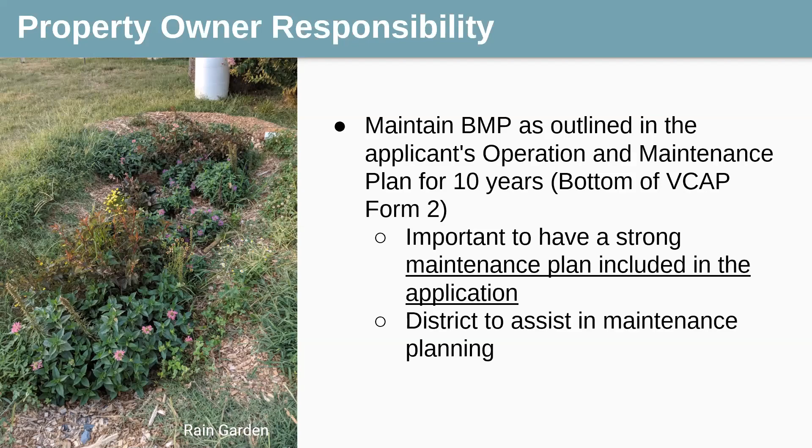And we do have this Form 3 that is on our website. It is required to be submitted to us with payment requests to be able to send payment to the district to be sent to the landowner. And it lays out everything that is binding for the landowner in terms of a contract. I highlighted this one section that the landowner accepts responsibility for the maintenance of the BMP for the duration of its project lifespan, and they're responsible to maintain it as per installation. And all that documentation should be submitted to us with the payment request, so we know what was installed and what is expected to be maintained.

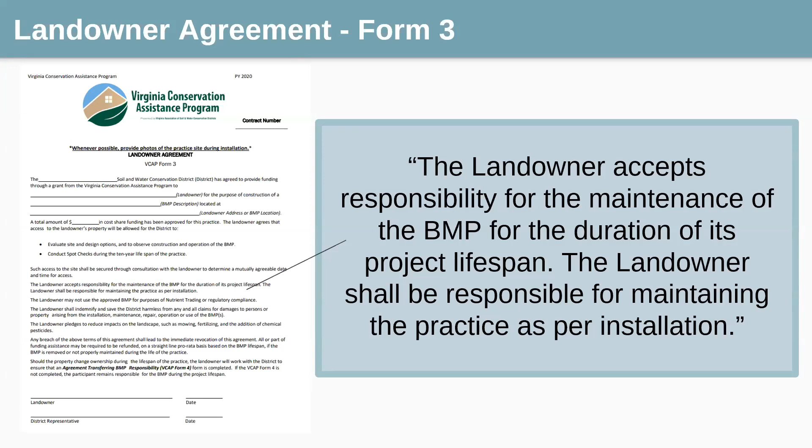And some districts handle this differently. They may collect this at the initial application, or they might just submit it to us for the payment request. Doesn't really matter as long as we have an accurate Form 3 with the correct cost share amount and the correct signatures. So on the other hand, the district's responsibility, and this is more clearly laid out in the manual, is to check up on the projects that have been installed to ensure they're still viable through the spot check process. And I'm going to go into more detail just after this slide.

Districts are responsible to inform their district board and the steering committee, more so for the VCAP staff, if there are issues that are found in terms of non-compliance or any corrective action that's needed.

And like I mentioned before, that's the expectation, but the more the district can be involved, the easier this process is going to be. And Kevin, myself, and all the association staff are here to help with any issues. We're a shoulder to lean on. We're not throwing this to you guys without any assistance.

We've got your back. And the last little point on here is that the district shall ensure that the BMP is maintained regardless of transfer of property. If the property owner moves, it's still the responsibility of the district to be aware of that and get the correct paperwork, or just make sure that it's maintained regardless. And those can be various scenarios, but that's kind of the more broader requirement.

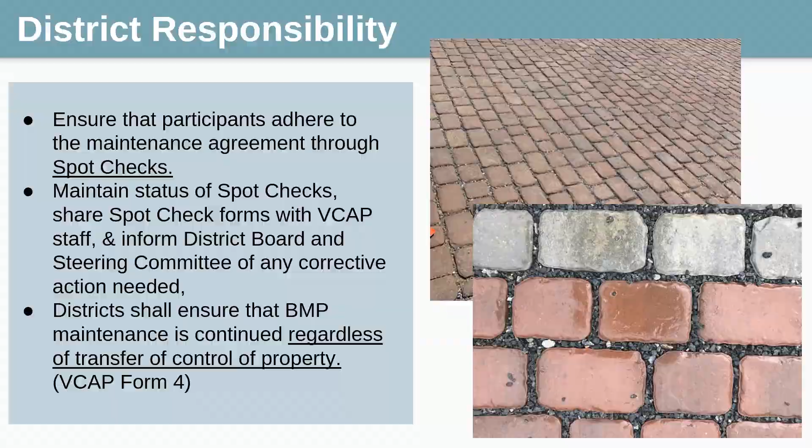Let's see, I've got some more examples of this form moving forward, but it's up to the district to notify the landowner before going on the property. And that is listed on the Form 3 that the property owner is acknowledging that they're allowing. So there's that covered base.

And spot checks are handled at the district level and should be maintained and shared with VCAP staff, like I mentioned earlier. We don't really have any more requirements other than it should be handled with the district and shared information with us, but we do want to give flexibility in how and when spot checks are done at the district level. And if you have any more questions, you can always reach out to Kevin or I.

But we do like to leave it up to the district about how they wish to do the 25% selection of active projects. And obviously the districts that have a lot more implementation and have been doing VCAP for a lot longer have more spot checks to do than districts that maybe only do a couple projects per year or are just getting started. So some projects will be inspected more often depending on the district that they're in, but the idea is that every project should be inspected about twice in a lifespan.

And the purpose of the spot checks, just to make sure we're all on the same page, they're not a technical inspection. That's only done at the initial verification for payment request. Spot checks are a visible inspection, making sure that the practices are still there, they're viable throughout their whole 10-year lifespan. And the purpose is to go through some guided questions and determine if there's any corrective action needed for the BMP to continue to function.

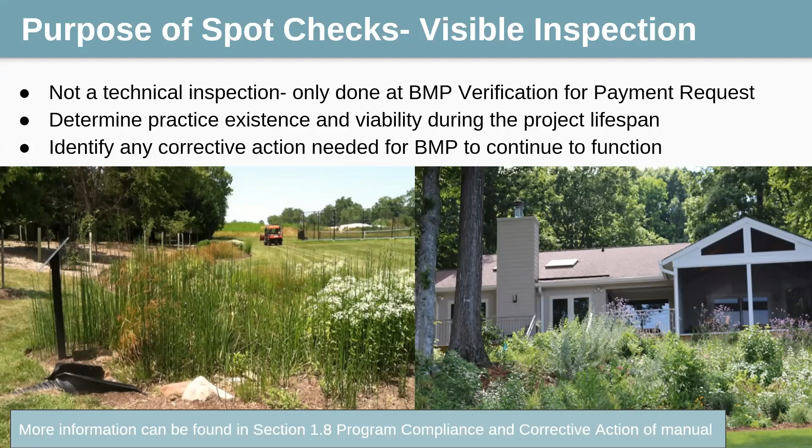If they're done every 2 years or so, we should never get to that point, but oftentimes they do need maintenance, or something as simple as taking trash out of the conservation landscaping, and that would be something that would be needing maintenance, but also very simple. And at the very end, I'll go into more details about the corrective actions policy that we have in place.

If you're looking to learn more about technical verification, which is not necessarily this, but if you are looking to learn more, I would highly recommend doing the CBLP training, Chesapeake Bay Landscape Professionals Level 1. I did it myself, as well as Kevin and a bunch of district staff, and it does really help give you experience in field verification, more so than what you need for this job, but it really does give you a bunch of knowledge and get you out in the field to actually practice doing that yourself.

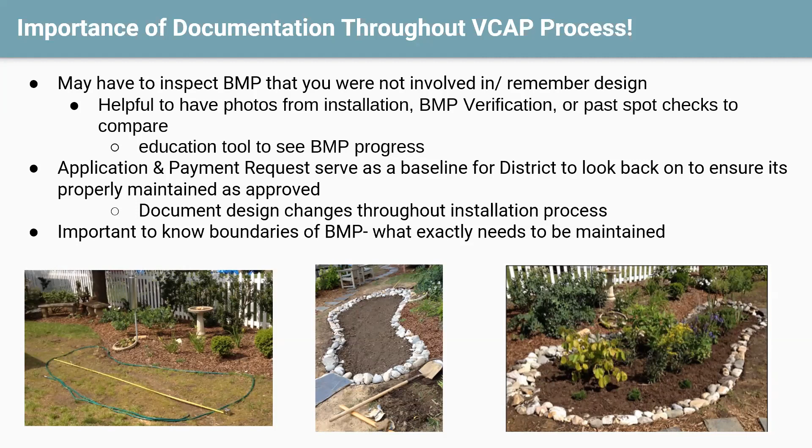And one last little note before I get into the BMP specifics is oftentimes with places of worship, HOAs or schools, the responsible party might turn over frequently, which means maintenance might fall through. So if this is the case, I would, as a district, recommend you have a more detailed maintenance plan than maybe just a property owner in a suburban area or such.

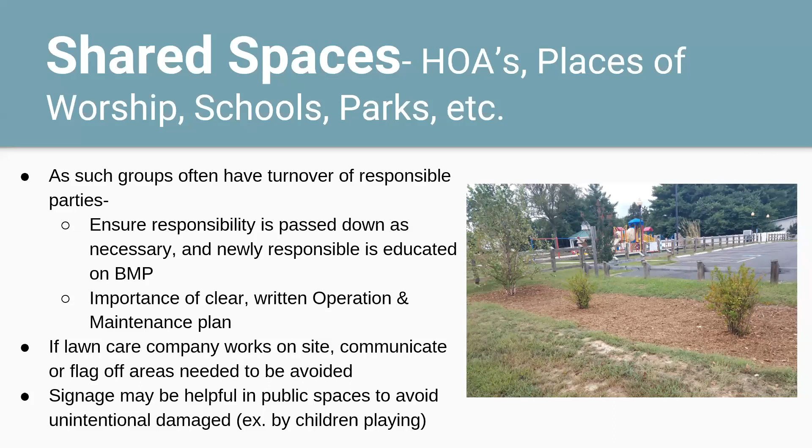Okay, so now I'm going to get into the BMP specific maintenance. And like I said, this training is from a canceled almost full day training, so I'm not going to go into full detail of what's included here, but I do want to show you where these resources are so you can refer back to them at a later date. Yes, we will go over general maintenance recommendations for these BMPs. Oftentimes the BMPs have subcategories, so just a caveat, this is a general maintenance recommendation. Each BMP maintenance plan should be site specific and really honed into what the site conditions are.

And I hope this gives people a background about how they can better educate applicants at an initial site visit, help them create a maintenance plan for their application, and give them expectations about what their BMP might look like in 2 years, and help district staff feel more confident in spot checks as we will go through each BMP and what to look out for on spot check.

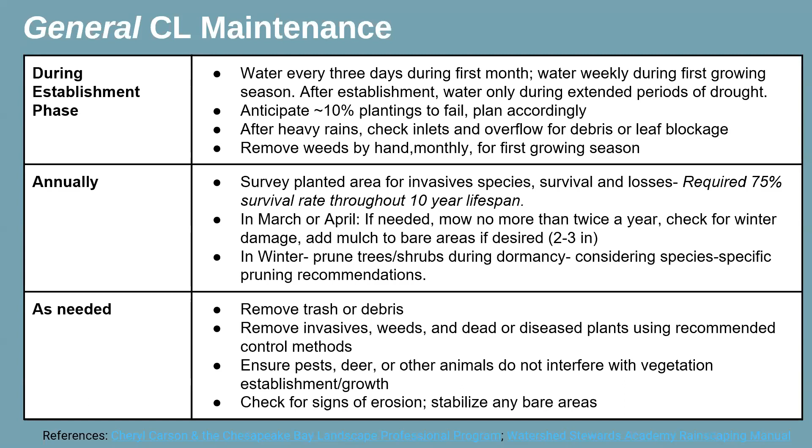Mowing is something that becomes a little trickier based on each practice, but has had issues in our program history, so developing a mowing plan with your applicant would be important if that's necessary, like for a meadow. Winterization, pruning trees that might be causing debris buildup or shade should be considered. And like all practices, removing trash or debris, making sure pests aren't interfering with it - especially early on - and looking for signs of erosion or bare areas in the drainage area.

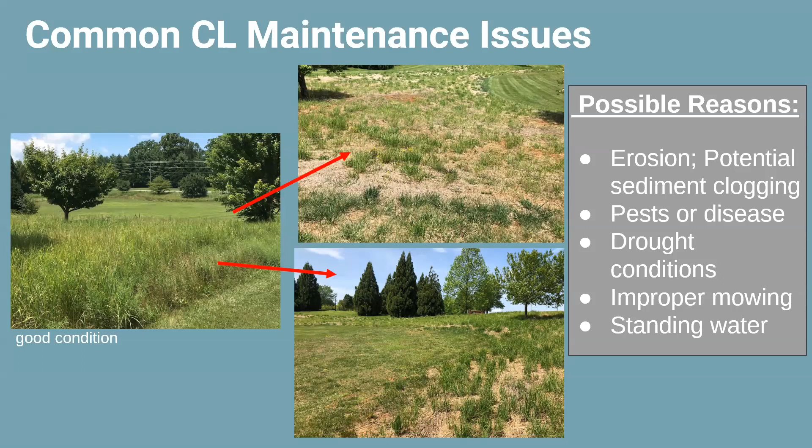Pests or disease, drought conditions, or standing water - all those things would be something that you would note on a spot check form to make a plan moving forward on how to correct. And these are not VCAP problems, or one of these is a VCAP project, but these are just in general.

Other things to look out for would be weeds, trash - especially in public places or public roads where it's kind of out of the control of the landowner - invasive species, tree tube problems, or the planting density being too low, too much mulch, anything like that. Relatively simple to fix, but it's considered a maintenance issue and something that should be corrected to maintain that proper planting density.

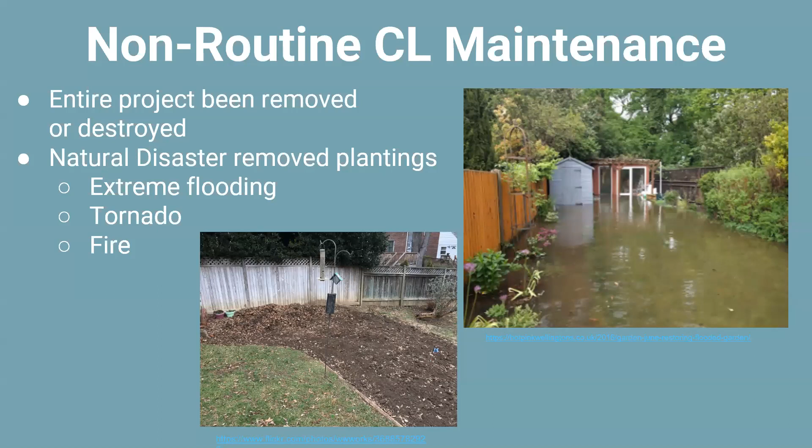These are some examples, again not VCAP, but what are larger issues that you would want to involve Kevin or myself to talk about. If you go for a spot check and the project is simply not there, that's definitely a major issue and one that we should be contacted for, especially your district board as well. When it comes to natural disasters - flooding, tornado, fire, hurricane - that's also something that you want to get us involved in so we can take the proper steps to decide what to do with that.

Okay, I'll move on to permeable pavement next.

For permeable pavement, preventative maintenance is really important for these projects, and a lot of contractors will make recommendations about how to maintain them, which is great. But at the same time, those should not be disregarded—the standard VCAP specifications still need to be maintained regardless of what the contractor or manufacturer recommends.

The most common maintenance problems to look out for and educate applicants or landowners about would be sediment clogging, or broken or shifting pavers causing the BMP to fail. Maintenance is required to include the surface material, meaning the pavers and the fine gravel in between, the observation well if present, as well as under drains, and the drainage area, which usually means the downspouts connected, the rooftop, or the site just surrounding it.

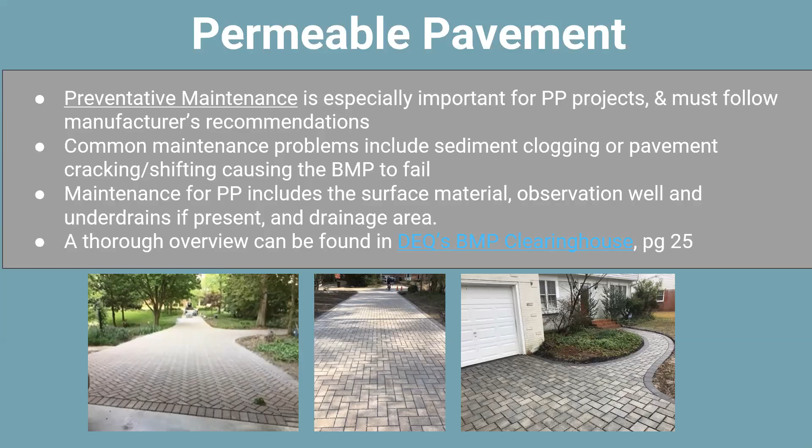This is one I really would recommend the district, and maybe a landowner if they're interested, refer to: the DEQ's BMP Clearinghouse. It's got a very thorough and really great overview of the standards for permeable pavement and the maintenance that's suggested to maintain them. Things to avoid on permeable pavement surfaces—

Usually things involving cars, oils, any kind of chemicals really should be avoided because those can leak into the pavers and cause issues. Sanding, construction activities, resealing or resurfacing the driveway is a big no-no. Power washing the house should be avoided, or just be very cautious that debris coming off doesn't clog the pavers.

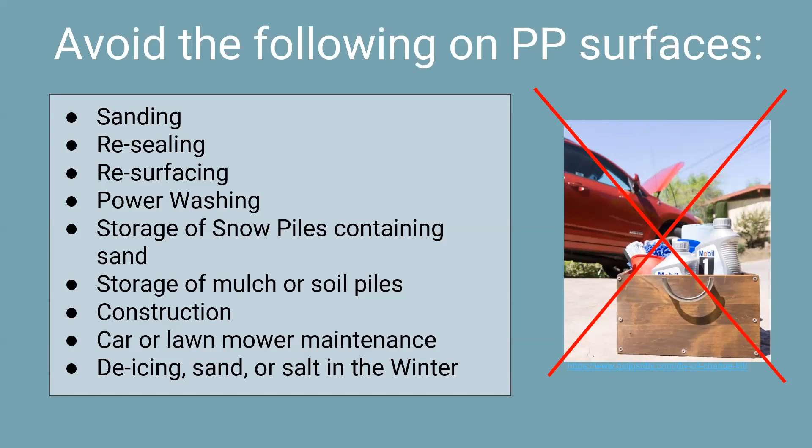Wintertime storage of snow piles, sanding, de-icing, or salt—those can cause issues as well. Same thing with big mulch piles or soil. And like I mentioned, car or lawnmower maintenance should be done off of the pavers just to avoid anything.

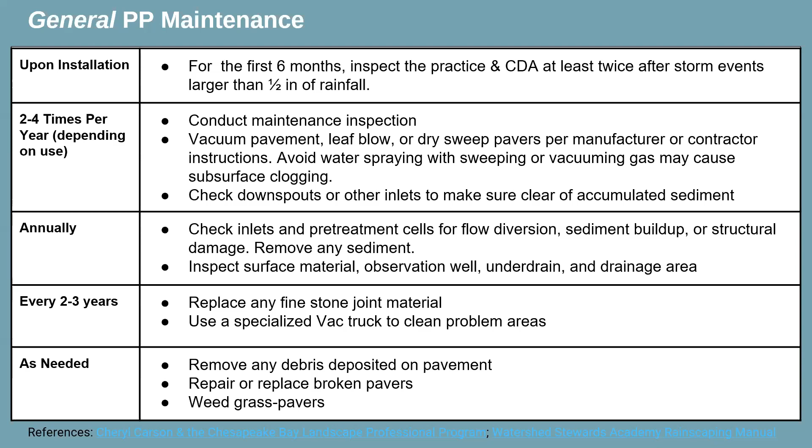Every two to three years, depending on use, replace the fine stones at the very top, or use a specialized vac truck to clean those problem areas. And if there's any vegetation growing up, that should be removed certainly, and checked to make sure it's not a continuing issue.

It is recommended that district staff, on their spot checks for permeable pavement, complete a falling head infiltration test. A lot of the functionality of permeable pavement is not seen at the surface—it's happening underneath—so it's difficult to spot check when we can't really see what's happening beneath the surface.

But again, examine the pre-treatment gutters, pavers, all of that, and make sure the drainage area is stabilized. And talk to the homeowner about whether they've seen any issues with standing water, making sure it's an open conversation so you're both on the same page and can be helpful to nip issues in the bud as quickly as possible.

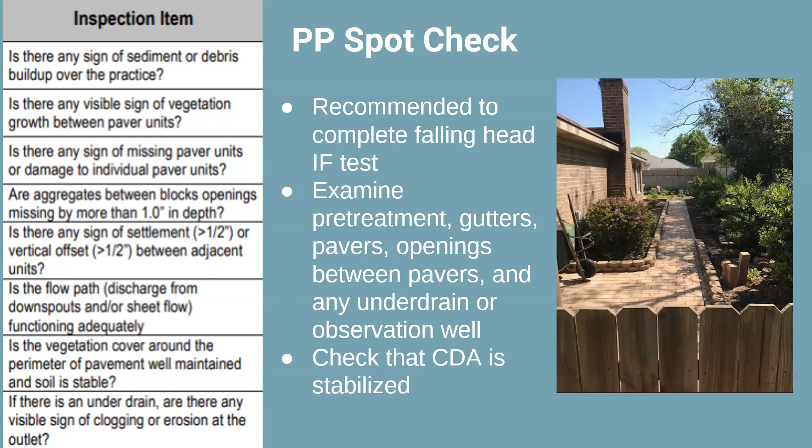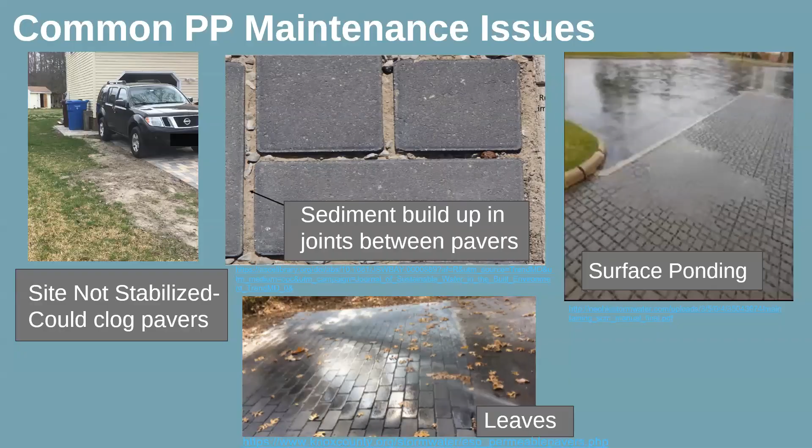Larger issues—these are not VCAP projects, but if a permeable pavement was to be neglected for a long time, these are issues that could happen, like sediment caking and vegetation growing through, and these would be quite an expensive maintenance issue to solve.

So those are what could go wrong, but should be avoided with regular spot checks and open communication with the homeowner. Something like a driveway hopefully does not receive this much sediment and would not be an issue.

One other thing I wanted to point out with permeable pavement is a lot of times we see issues upon an application where maintenance might be an issue moving forward, such as we already see a bunch of pine needles or sand, just bare areas nearby.

And while we see it's an issue, the landowner signing that Form 3 is really all that needs to be said—if they're signing that Form 3, they are obligated to maintain that permeable pavement as required of them. So though we see issues, and you might see issues too, having that conversation about how we can combat that issue is important, but at the end of the day, it's the landowner's responsibility to keep that maintained.

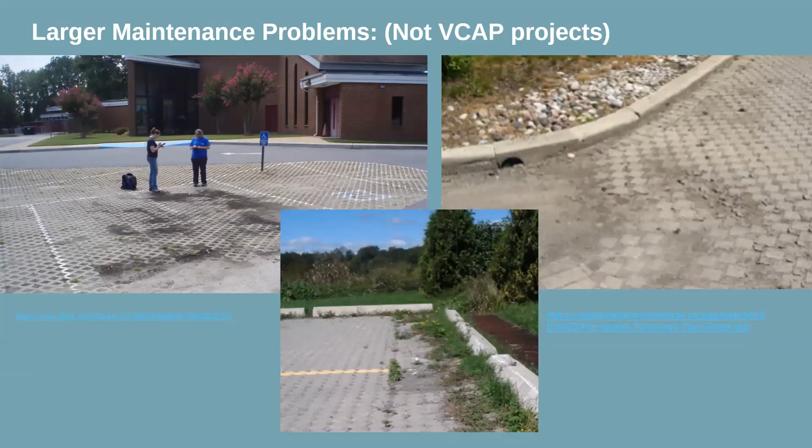We'll go back to a more vegetative practice. Rain garden and bioretention I looped in together here. Really, their standards are quite similar in terms of what's required of them, just a matter of scale that separates the two.

Just like conservation landscaping, rain garden and bioretention should be maintained at their inlets, their outlets if present, the under drain observation well, and pre-treatment cells. That's a big part of maintenance for rain gardens.

Something to look out for, and something homeowners or landowners should be aware of, is that water should not be standing for more than 48 hours after a rain event. If there is standing water, that means there are some issues happening beneath the surface, and that's when we want to get some corrective action and make some recommendations to fix that.

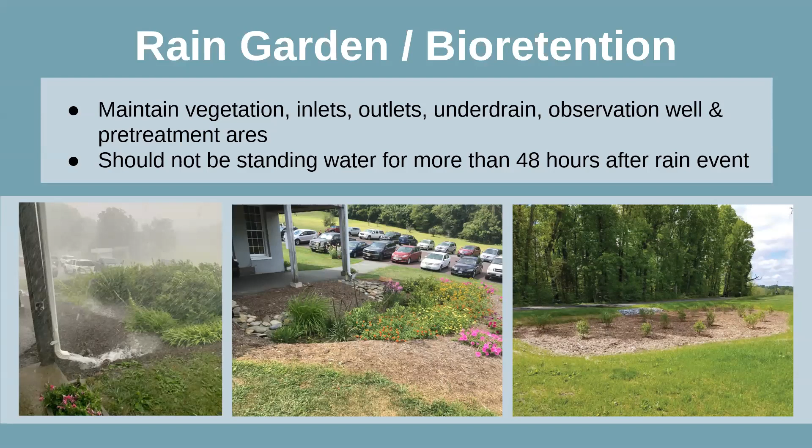But a lot of the reason we have such strict standards for rain garden bioretention is that we look at the soil type, the water table, and the drainage area, and we make sure they're properly sized where we hopefully avoid these kinds of issues. These are just worst case scenarios that we want to look out for.

Another one of those maintenance calendars, again very generalized. Some rain gardens and bioretentions might look very different, but as a whole, this is the maintenance that should be expected. The drainage area should be kept an eye on, with the same planting density requirements, although mulch is a bigger part of a rain garden than conservation landscaping.

I don't want to go into too much detail for time's sake. I'll go ahead and go to the next one.

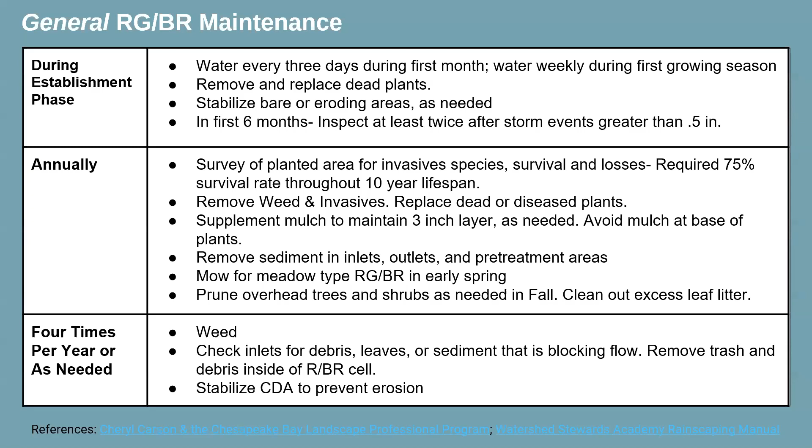Here the rain garden and bioretention spot check forms are identical. You want to make sure the water is not being diverted or obstructed when it's getting into the rain garden or bioretention cell.

For public areas, trash could be a bigger issue to look out for, as well as sediment and debris buildup, which could cause sediment caking on the surface and kill some of the vegetation, so that should be avoided. Invasive species are something to look out for, and again, 48 hours of pooling water is a red flag.

And looking at an under drain or observation well, if possible and that's present, will be really helpful in the spot check.

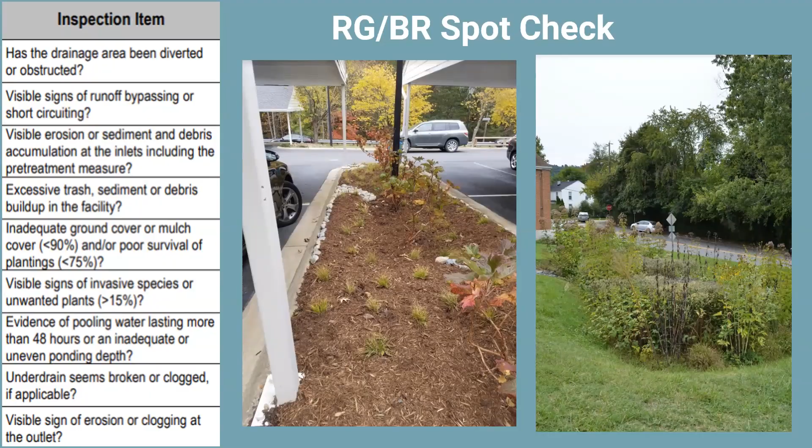Some issues to look out for—these are again not VCAP projects. As a whole, it's difficult to find maintenance issues for VCAP projects because they've been maintained very well, so that's a good problem to have.

But to look out for in rain gardens or bioretention: is it way overgrown, does it need weeding? Not only is that a safety issue for places like a school, but it's going to be really difficult to get back to the planting plan if it's really neglected for a long time.

Look for erosion inside or on the side slopes of the rain garden or bioretention. Standing water, especially if noticed early on, should prompt looking to make a change to fix that. Blocked inlets or outlets, such as that photo below with the leaves blocking the inlet, would cause water to be diverted and not be treated in the rain garden like intended.

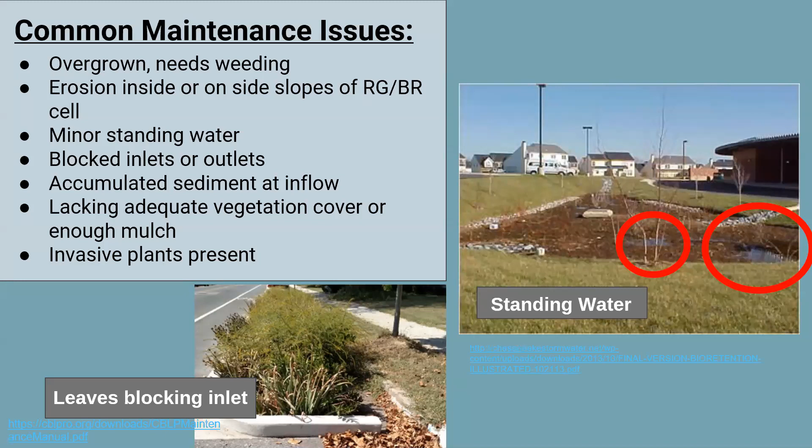Accumulated sediment at inflow could be similar to the leaves, just sediment. Invasive plants, and then lacking vegetation cover or mulch where it's not going to be maintaining water like it should.

This was a VCAP project, and this is a pre-treatment cell. It's clear that there is some vegetation growing and some sediment caking. It's doing its job, holding sediment and blocking it from getting into the cell, but that does need to be cleaned up. So it still continues to be a pre-treatment as it's supposed to be.

There is some sediment caking from a red clay uphill construction site that was noted, so that's a reason for this. But if this is found on a spot check, corrective action would be needed or recommended to just clean out that pre-treatment cell. The rain garden itself looks really good, vegetation is well maintained.

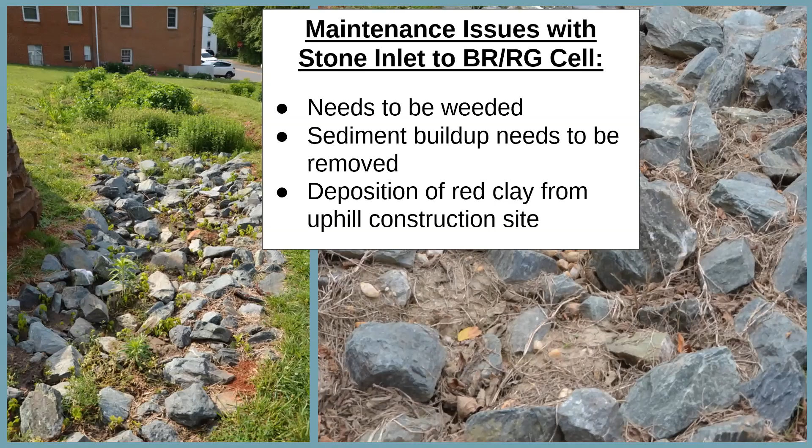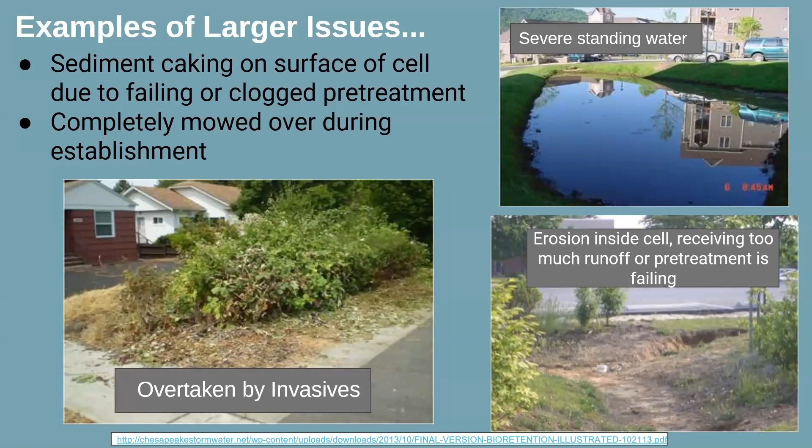Here are some pictures of larger issues that could happen, not VCAP projects, but like I mentioned, the sediment caking on the surface is completely overtaken by invasives where it's going to be really challenging to get back to those native plants. Or there are examples where, unfortunately, sometimes the rain garden is completely mowed over during establishment, and then that needs to be replanted, unfortunately.

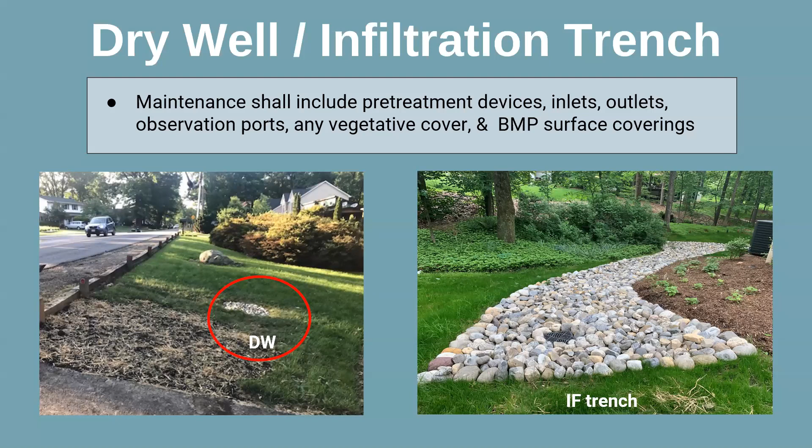Moving on to dry well and infiltration. These two, obviously, there are different designs for dry wells and infiltrations even within the two categories, but they are lumped together with DEQ maintenance. They shall include the pre-treatment devices, inlets, outlets, observation ports. If there's vegetation covered, that should be maintained, and or the BMP surface covering, like this infiltration trench on the right - the rocks need to be maintained and cleaned of sediment and debris.

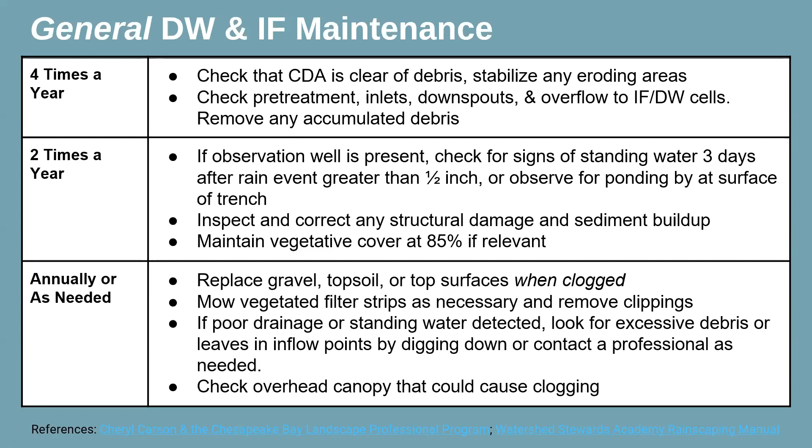Vegetative cover, if relevant, should be checked 2 times a year. Then annually or as needed, replacing the gravel, topsoil, or surfaces when clogged, and mowing vegetated strips if necessary. Yes, if there are any trees dropping debris, that should be checked and pruned as needed.

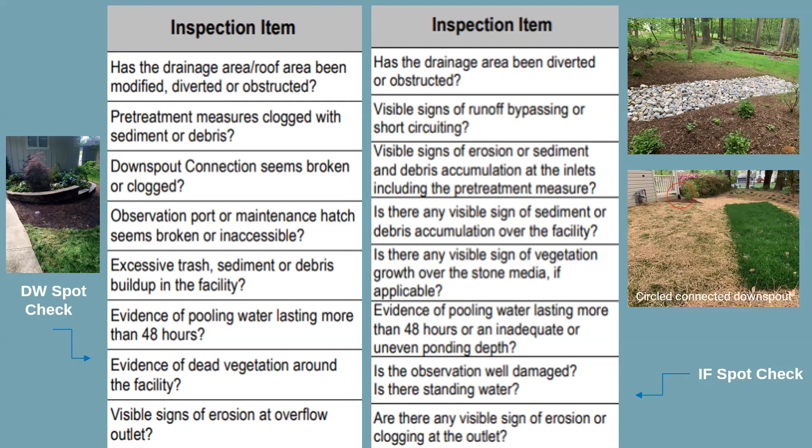Some scenarios to look out for: this photo on the left was just installed, so I wouldn't say this is an issue as it was, but if you were to go out to a site and inspect a dry well and saw loose soil like this, that would be an issue. This happened to be just installed and the photos were taken right then and there, so that would be seeded and stabilized.

On the right is an infiltration trench, and a lot of issues going on with that one. You can see the leaves and the vegetation growing through, as well as the level spreader is not level, causing blockage, so that needs to be cleaned out.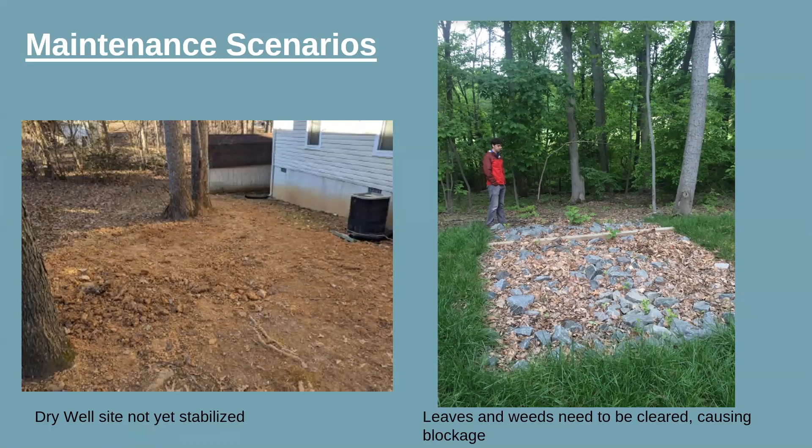Just be aware that the location is sometimes hidden for a dry well, so make sure it's not lost, cannot be found - that would be an issue. Maybe the district should also be responsible to know this as well.

Being careful not to mow over the observation well cap - that's an obvious one. Maybe painting this a fun color would be helpful. And then just an emphasis on sediment trapping before it reaches the trench or dry well. There's an example of a dry well on the left here, and a photo from the Chesapeake Bay Foundation, I believe - just keeping your gutters clean before it enters the dry well.

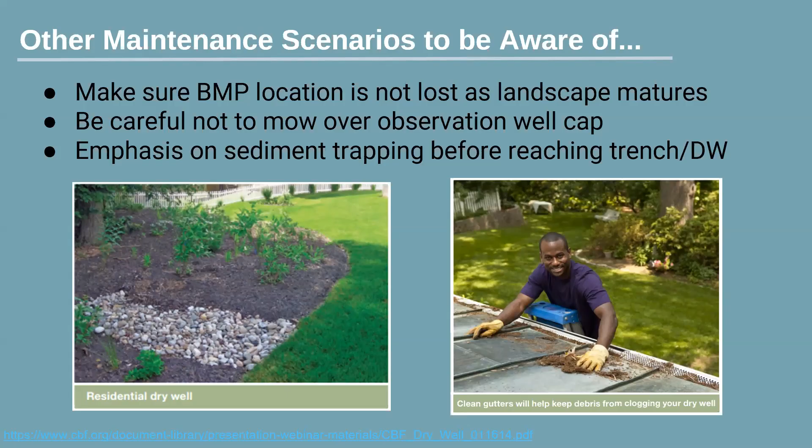Rainwater harvesting, we're moving right along.

Deceivingly has a lot of maintenance recommendations. I think the main kicker for this one is just cleanliness. I'm avoiding mold, algae, mosquitoes, things like that.

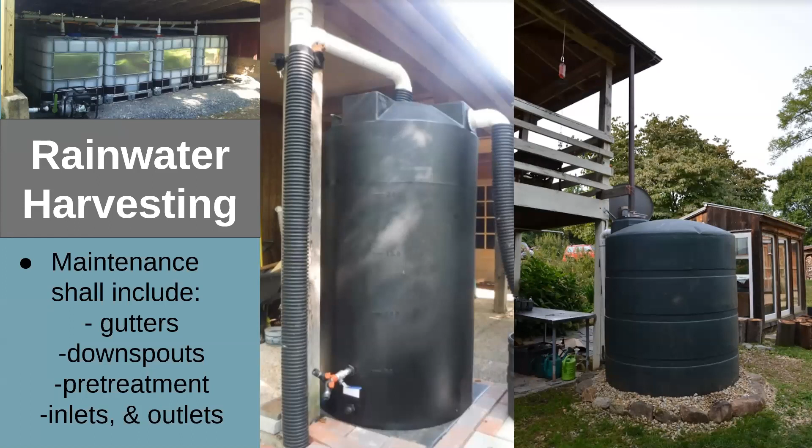But in terms of VCAP in our manual, maintenance shall include the gutters, the downspouts, pre-treatment, inlets, and outlets. And winterization is a big part of this as well, which I'll talk about on the next slide.

In the fall and spring, it's recommended to inspect and clean the cistern and the lid, the screening devices, the first flush diverters, keeping all that clean and avoiding debris before it gets into the cistern. Making sure the mosquito screens are secure, with no holes or openings which allow mosquitoes to enter.

No one wants to deal with that. Looking for things like pollen and organic matter, especially in the first year, so you can know when and how is the best cleaning method for your site. Every site's going to have different kinds of overhead trees, so that's something that should be site specific.

Winterization is going to vary based on the design of the cistern, but I would say the most common method that we see very often in our applications is to completely disconnect the collection lines and empty the pumps and pipes before first freeze. If it's below the frost line, underground, not so necessary, but that's up to the homeowner to decide.

Before putting it back together, look for any cracks before hooking up again. This also might vary based on the water use plan. If you're going to need that through the winter and weather will allow it, it's again up to the applicant to decide that and put that in their operation and maintenance plan in the application.

Every third year, just looking at the vegetation overhead and preventing debris buildup on the cistern. I've got some photos on the next slide of kind of worst case scenario that I found on the internet. Looking at the foundation, making sure it's still secure, the pumps, the pipes.

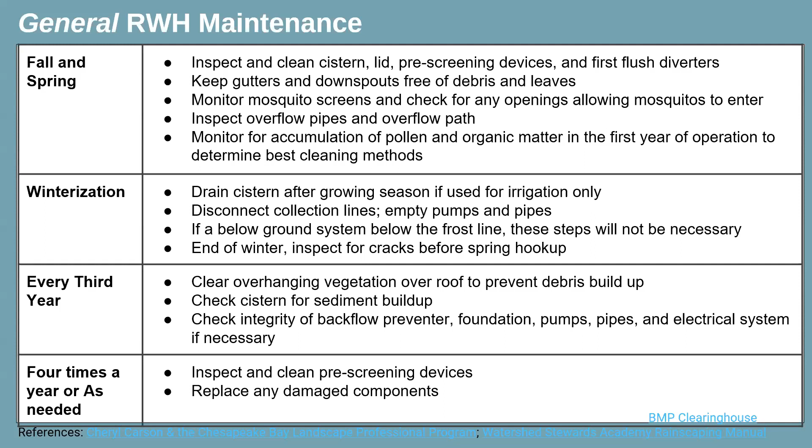And then 4 times a year, just replacing anything that's damaged, reconnecting any disconnected pipes after a storm or what have you, just looking at the pre-screen devices and clearing them out so they continue to pre-screen as they're supposed to. A spot check for rainwater harvesting.

We don't need you climbing up on the roof to get inside these things or anything like that, but again, it's a visual inspection. Looking to see, are the gutters and downspouts clear? Are there any cracks or leaks?

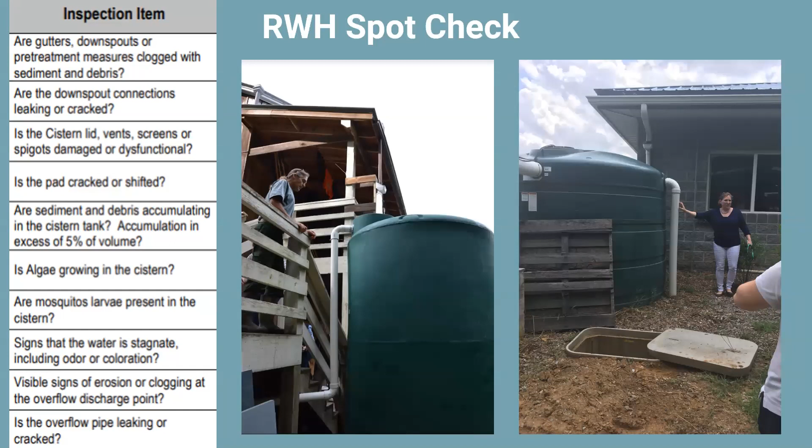Is the cistern lid and such functioning and clean? Is the foundation pad shifted or anything like that? Sediment accumulation, algae, mosquitoes. It should be pretty clear if there is any kind of odor or anything like that. And making sure that the overflow pipe is not leaking or cracked.

Some issues that you could find: the issue on the left is actually pretty simple. The pipe became disconnected. I believe that's at a school. Pretty obvious and a pretty easy fix.

Issues on the right are from the internet, and I hope this wouldn't happen. But if the gutters get so clogged and end up blocking the whole cistern, that would be a problem, as well as a simpler issue, debris buildup on the screen. Should be really easy to clean, but if that's seen on a maintenance spot check, it's recommended to clean that. And hopefully mosquitoes haven't gotten through the mosquito screen, as long as that's well maintained.

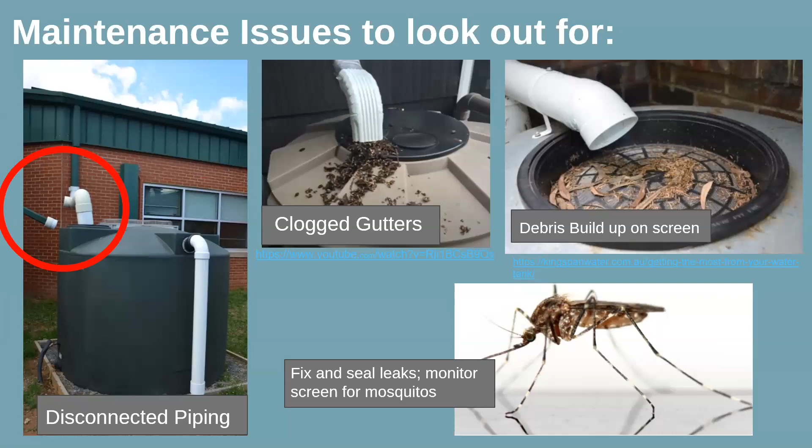Okay, we're getting to, I believe we have 3 more. Vegetated stormwater conveyance - we actually just did some major updates to these specifications at this fiscal year 21 program updates that Kevin might talk about. If not, it will be obviously in our manual.

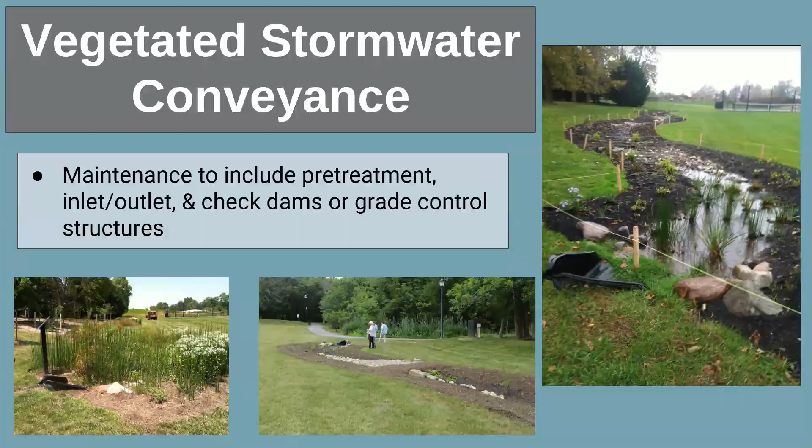But with each of our subcategories for vegetated stormwater conveyance, maintenance is required to include the pretreatment, inlet, outlet, check dams, grade control structures, all that. I won't go through all these, but as a whole, if they're vegetated, they're required to be maintained as our vegetated practices are.

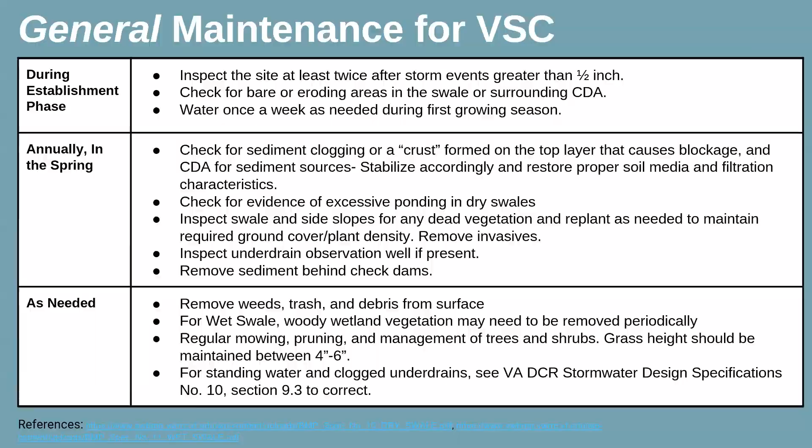For a spot check, like I just mentioned, you want to survey vegetation, drainage area, signs of sediment clogging. Specifications might be slightly different for each iteration or each dry swale, step pool conveyance, or wet swale, but our inspection sheet is the same. Looking at the under drain, inlet, outlet, and that the check dams match approved design plans. And like all these BMPs, they're visibly looking maintained, and they match the design plan that they were approved and installed for.

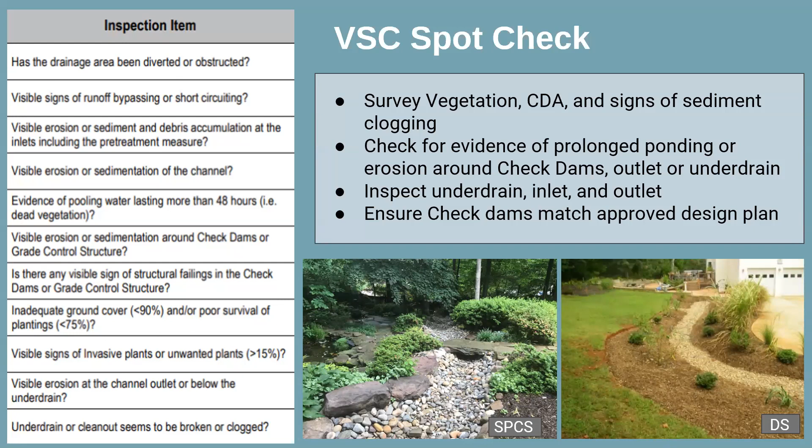Living shorelines, one of our more different projects, but we still have maintenance for them. I would say for this, more so than a lot of the projects, maintaining a photo log would be really important to see how these are continuing to develop and stabilize the shores. There is possibility for storms and things like that. So having that photo log is important.

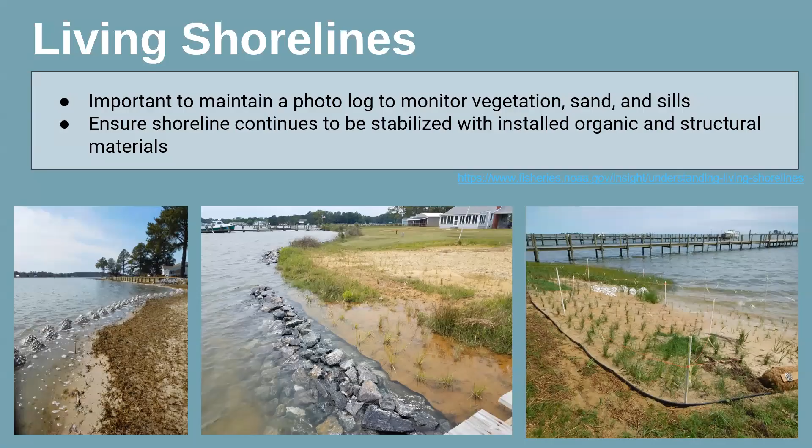And I think that's something that you can ask of the homeowners, making sure that the shoreline continues to be stabilized with the organic and structural materials as installed. And these are photos from different points. I think most of these are just after installation. But as a general living shorelines maintenance, checking on these new plantings, especially after a storm, taking into account that there might be loss of vegetation, and that's normal, so plan to replace those.

Big one is to monitor for invasives such as Phragmites or goose or other animal issues. Checking for plant survival every year to maintain that 90% cover. Replace every year if needed. Remove trash and debris. Look for any kind of damage, maybe from boats, anything like that every year should be assessed. And making sure that the sills are stable.

Slope is still maintained at a fill of 10:1 or flatter, replacing sand if necessary, and then as needed, removing debris, especially after storms, driftwood, things like that. And if shade becomes an issue that wasn't a part of the intended planting plan, pruning overhead branches to make sure that the shade's not blocking the marsh vegetation that's needed to be continuing to grow. And uniquely for living shorelines, the best reference would be VIMS for more in-depth about their maintenance plan. It's not in the clearinghouse.

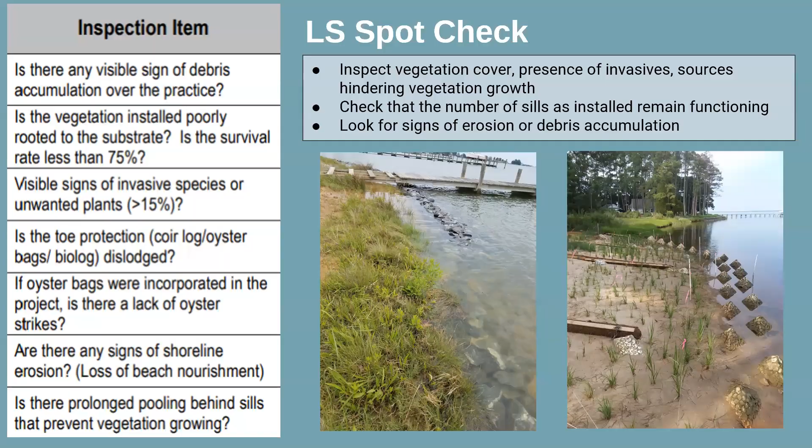For a spot check for living shorelines, looking at the vegetation cover is the most important part, looking for invasives, anything that's causing vegetation growth to be hindered, looking at the sills, like I mentioned, and signs of debris or erosion. Potential for storms, like I mentioned, hurricanes, are out of the control of any of us. So large-scale damage should be handled on a case-by-case basis.

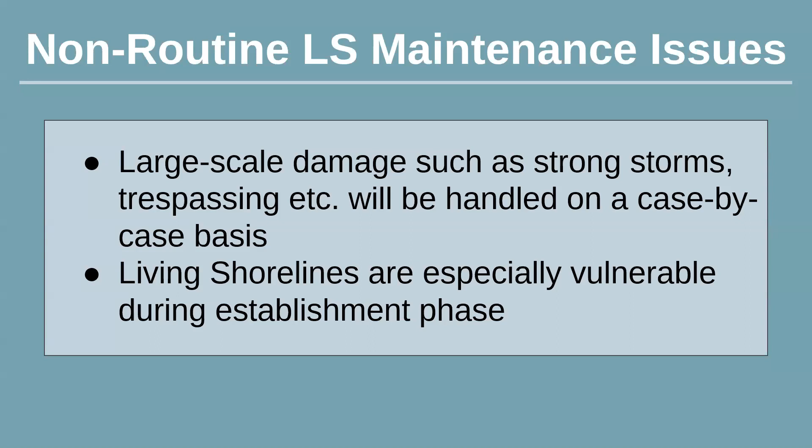Kevin and I and the association are here to help. Obviously, we know that they're vulnerable, especially early on. So just keeping a good relationship with the homeowners and keeping us involved will help you with any issues that we hope don't come up. This one more, I'll fly through these so Kevin has time for his updates as well.

Green roof, big kicker for this one is that we don't need you putting your safety at risk. You don't need to be climbing on the roof. Again, it's a visible inspection. So if you're able to use a ladder or so to take a look safely, that's great, but keep your own safety in mind. The maintenance for the homeowner is expected to include vegetation, soil media, drainage systems, and structural integrity. And OSHA requirements do come into play here, so make sure the homeowner is aware of their own safety precautions. And vegetation and structural integrity obviously depends on the soil depth and the type of green roof that's installed.

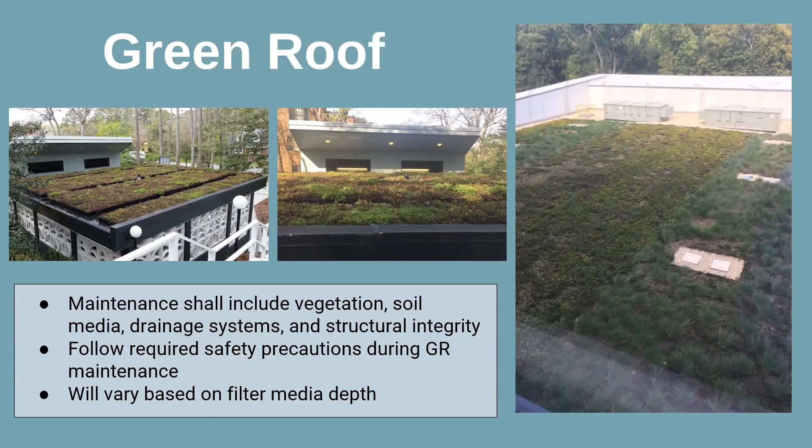Deceivingly little maintenance for this, but just as important to make sure plant growth is still good, meets our specifications, replacing dead or diseased, and making sure the structural integrity of the roof is there. Look for leaks, drainage problems, debris in the roof, drains and gutters, mow or trim as needed. And yes, I mentioned this already. I'll just fly through this, but this will be available.

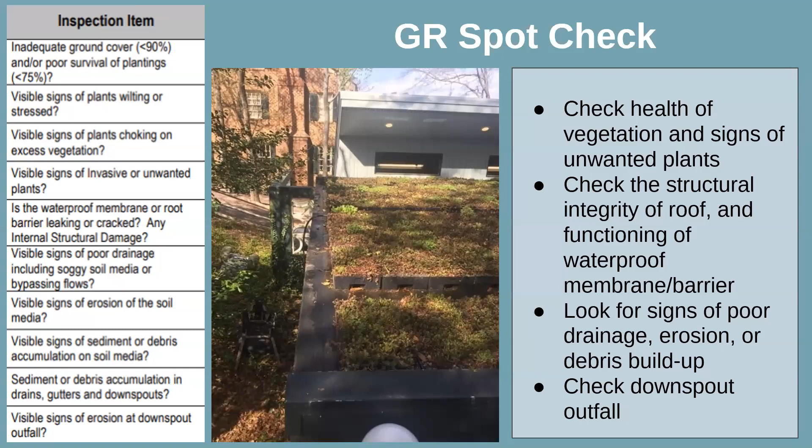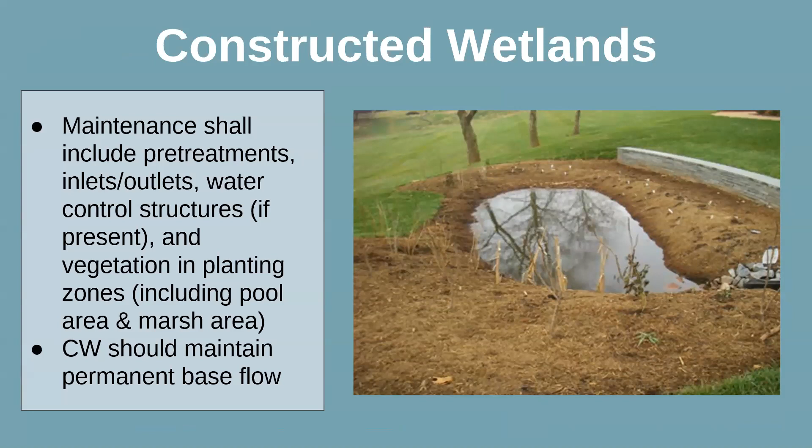Last but not least, constructed wetlands. Again, we did just do a pretty large update on this that Kevin may or may not talk about, but the specifications will be in our new manual. Maintenance for constructed wetlands shall include pre-treatments, inlets, outlets, water control structures if present, vegetation in their various planting zones as required, and they should maintain a permanent base flow. All this should be decided during the operation and maintenance plan. This should not be a surprise to anyone installing constructed wetlands.

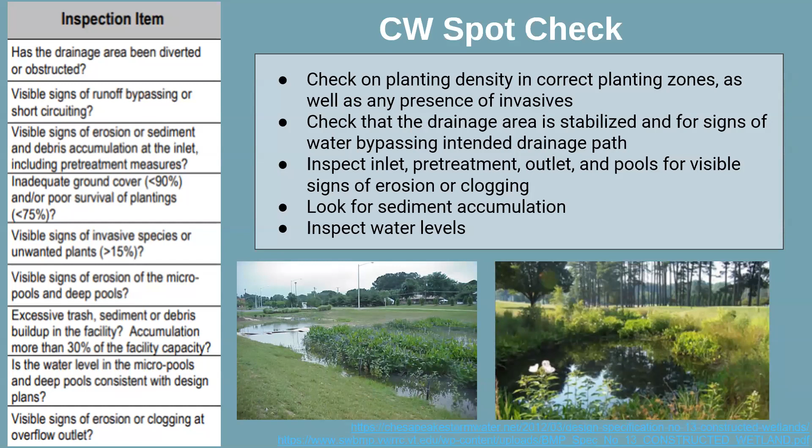We've never actually had a constructed wetlands completed, so this spot check form has never been used, but we are hopeful someday it will, especially with our new specifications, checking on the planting density, drainage area stabilized, all the components, inlets, pre-treatments, outlets, and pools, sediment accumulation, and water levels would all be a component of the constructed wetland spot check.

Some issues to look out for when and if we have a constructed wetlands project: invasive species, much like living shorelines, phragmites, and cattails, woody species that I mentioned. Mosquito problems are something that we get asked about a lot and should not be an issue with a well-designed constructed wetland, but professional assistance may be involved if mosquitoes were to be present and become an issue. And then sediment removal every 3 to 7 years, depending on the project.

Okay, the last 2 slides. If a BMP is found to be having issues, not being viable or in compliance with our standards, the district will be making recommendations to fix. Sometimes it might be past that point. We of course don't want that to happen and get to the point where repayment back to the association is necessary. But if a BMP is found to be destroyed or completely removed, the district will contact the participant with the notice of corrective action. This can be found in section 1.8, and again, I think we just did a couple updates on this in this new manual.

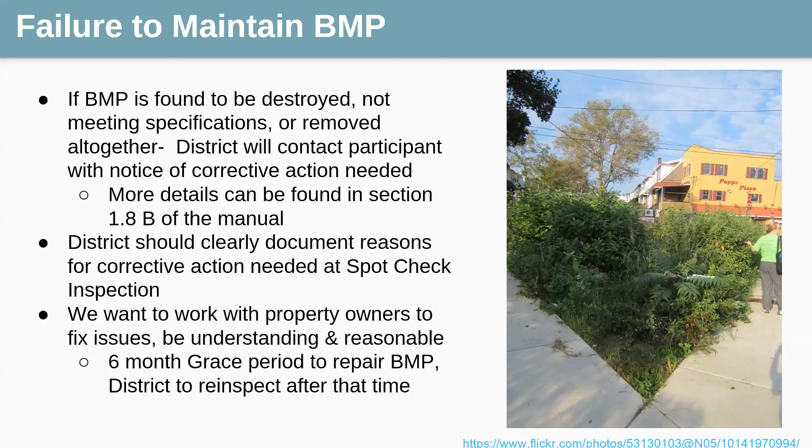Districts should clearly document the reasons for the corrective action needed, and that's something that we would greatly appreciate being involved in. We want to help you if there are some serious issues and work with you. We want to be as understanding and reasonable as possible. Our manual says there's a 6-month grace period to repair the BMP, with the district to re-inspect after that time. Again, we want to be understanding and reasonable and be involved to try and get this fixed if there are major issues. And, worst case scenario, if deemed necessary by the district board, the participant may be required to pay back a prorated amount of that cost share. And this occurred once this year, actually.

If there is a transfer of ownership and the new property owner does not wish to accept the responsibility, the original recipient of the cost share can pay back that cost share amount on a prorated basis. So this doesn't always have to be a worst case scenario. This could be a choice. But in the case of death of the participant, repayment may be waived, and there's a process for that in our manual. In more severe circumstances, a cost share repayment hardship exemption should be submitted to the steering committee. We want to be reasonable and help you with this. And if a property owner moves, like I said, that's an option for repayment.

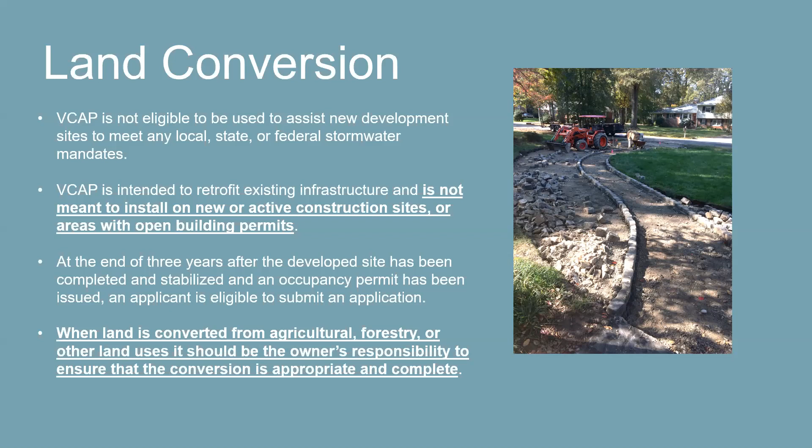We've also added some clarifying language for land conversion. This is important. We sometimes see former agricultural land, forestry land, or even just land that was cleared a few years ago and hasn't really been properly stabilized, come looking for cost share for these BMPs. And what we want to make sure is that landowners have appropriately stabilized and converted land like that first. And then if there's still a need for a stormwater BMP, then they can consider applying.

From an operational standpoint, at the district level, we just want to clarify that once funds, no matter where they come from, our various grant sources, federal, state, or otherwise, once they are funneled through the district and paid out to homeowners, it is considered local funds. That was something we had clarified with our auditors last year.

And a reminder that the appropriate tax forms should always be distributed and collected during this process, namely gathering a W-9 from an applicant at the time of application and making sure that you distribute a 1099 to them at the end of the year. We do occasionally get calls saying, I didn't know I was going to get a 1099 for this, or shouldn't I have gotten a 1099 for this? So we just want to make sure that that is happening with each and every project.

Now, if they're receiving less than $600 in cost share, they don't technically have to file that, but we would encourage every district to still go through this process anyway, just to cover the bases. FOIA issues with VCAP, which so far we haven't had many of, will be referred to the individual district where the question is coming up as a local government entity. So always refer to your FOIA representative at the district for those issues.

Some updates to steering committee participation. As most of you know, we added officially Northern Virginia Soil and Water and Henricopolis Soil and Water to our steering committee this past year. So all of our spots are full now. There are 6 total districts plus the association represented on the steering committee.

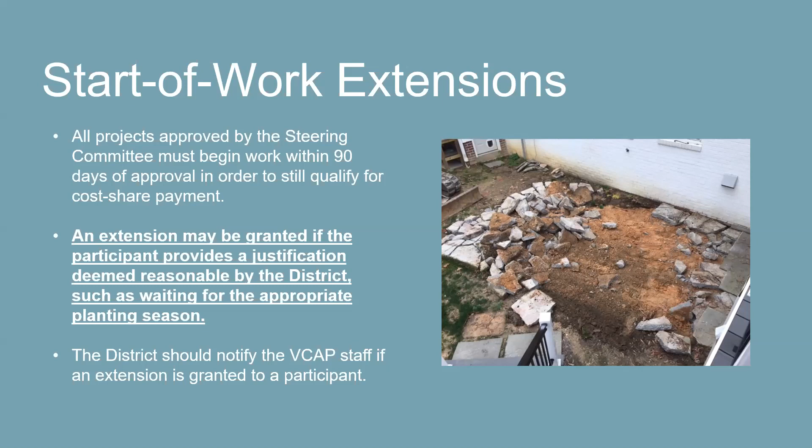In regards to our Form 7, which was new last year, I believe, we have overhauled that form this year. It's the only form of ours that we've made significant changes to, other than the ranking system. Really just to simplify it, to get rid of any bid requirements or anything like that. It's basically just a single document that says, hey, we ran into some unexpected costs, or we increased the size of the footprint of our project, or we went with a different contractor who had different prices.

It's important for a district and for an applicant to know that the amount of cost share they're approved for by the steering committee at the time they're approved is the only amount of cost share they're guaranteed. If they spend more, do more, or run into other costs, they're not guaranteed to get more cost share, and they'll never go above the cap for cost share for a project.

But they can submit to the steering committee a request on Form 7, explaining why costs went up and why they're requesting more cost share. Typically, if it's a reasonable request, we will approve it.

It's also worth noting that this isn't only dependent on the discretion of the steering committee, but if we are out of funding—for example, right now we're on a funding wait list, as of yesterday—we may not be able to approve that. We just want folks to be aware of that.

And clarifying this year for the first time: no matter when the project is installed, when it's inspected by the district, or when it's approved by the steering committee, the lifespan start date is not until January 1st of the following year, to keep things in line with other cost share programs and to simplify those policies.

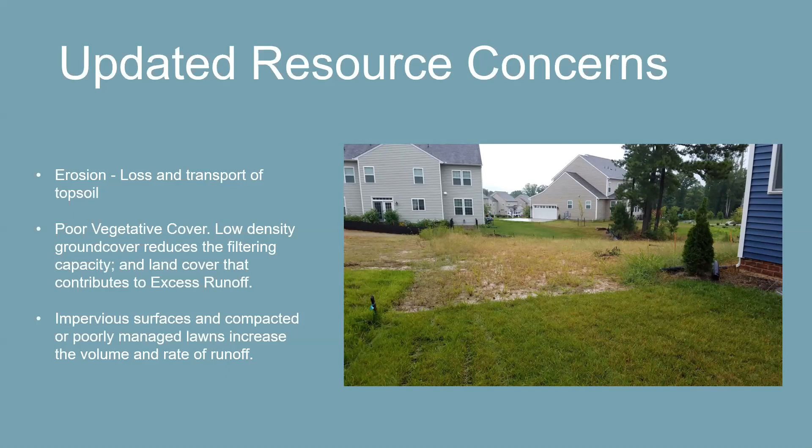A little bit of clarification here. This photo is just kind of one of those greatest hits when it comes to resource concerns on a site. Maybe a BMP is not even needed—it's just obvious corrections. That's more there for entertainment for all the stormwater geeks on the webinar today. But that being said, adding some clarifications to what resource concern is being addressed and that the BMP is addressing that resource concern. And we're not trying to discourage treatment trains in any way, but when it comes to cost share funding for BMPs, what we are really encouraging is, if there is a resource concern, an appropriately sized, appropriate BMP type project should be selected to treat that resource concern.

So if, for example, you've got too much water coming off your roof through a downspout, and you put in a rain garden that is appropriately sized and addresses that issue, you don't necessarily need conservation landscaping cost share at the outfall of that rain garden, unless there is another source of stormwater coming, for example, across the yard that will also intercept. But generally speaking, we don't need to see multiple BMPs with cost share in a row, and each BMP is going to have to address its own resource concern.

There's also some clarifying language. We've been kind of enforcing this all along, but putting it into writing in the manual: these BMPs are designed to address stormwater, and only surface stormwater. If there is groundwater seepage or man-made sources of water runoff, which we've had some inquiries about, that's not going to qualify as a resource concern or for the cost share that we're providing. The easiest example we see a lot is a sump pump from a basement bringing that groundwater back up and having an outfall somewhere in the yard that's causing an issue. That's not going to qualify for cost share for a BMP. That will need to be handled at the homeowner's expense or with some other method other than a full stormwater BMP.

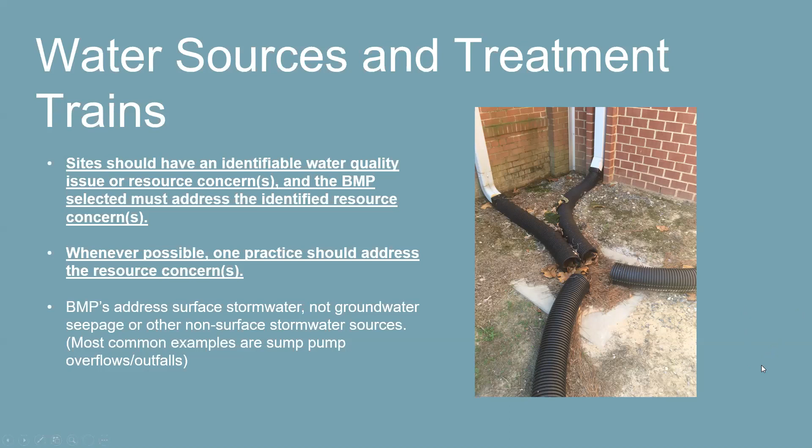As for BMP specification updates, as we've said, we're keeping it easy this year. We did really revisit some BMP specifications last year and kind of overhaul a few of our BMPs. We've made significant changes to constructed wetlands and vegetated stormwater conveyance, mostly to make them more accessible and more scalable for residential properties. Those would need to be revisited in some depth, which hopefully we'll be able to do in another training in the coming year, so I'm not going to try to dive into all of that right now. Please, I encourage you to read through the new manual, especially those two BMPs.

As Maura mentioned, we've never done a constructed wetland. We have done quite a few vegetated stormwater conveyances, but rarely on an individual residential property. So what we're finding is that the ability to fit these onto small lots to treat small resource concerns is not really there, and so we're trying to make those fit a little more with the program and the folks that we're serving. There are some minor updates throughout on the other BMPs, kind of just clarifying a few things.

The biggest, most important BMP specification update has to do with permeable pavement. We have seen a huge amount of demand for permeable pavement over the last year plus at this point. In the early days of VCAP, you could install permeable pavement anywhere, even if it was replacing your grass front yard with a new driveway made of permeable pavement. That was okay. Then we updated to say, if you are replacing a pervious surface with permeable pavement, you need to treat additional impervious surface—i.e., put in a brand new driveway made of permeable pavement where there wasn't a driveway before. You need to tie in at least one downspout, so you're treating some of the roof.

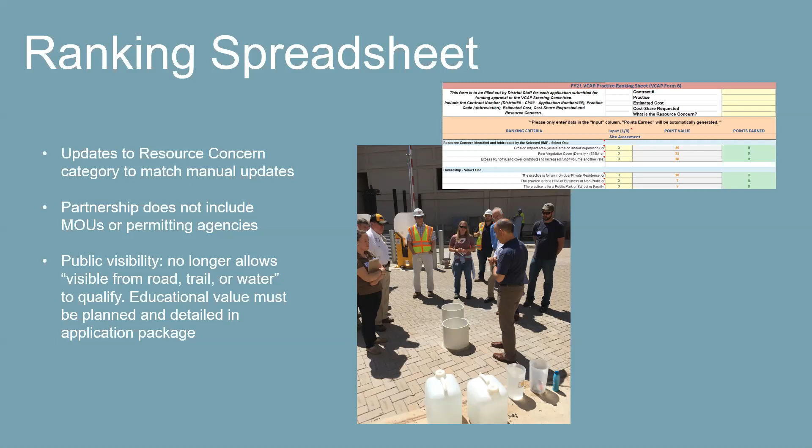As far as cost share rates and caps go, there are just two changes this year to individual BMPs and a bit of a policy tweak. If it hasn't already been made clear over the last few years of VCAP, depending on our grant sources, funding, and how the program grows and trends change, we can expect each year that there may be some tweaks to cost share rates and caps. That's just going to happen, and those will always take effect on July 1.

Changes here to total caps. We've always had a $50,000 cost share cap, but that was per year. If you were, for example, a property owner with a whole bunch of properties in a certain area, or a municipality or school, you could do up to $50,000 worth of cost share each year. We've never really seen that capitalized upon, but we're still trying to make sure we spread the wealth around, so that as many people as possible can access these limited funds.

So it is now $50,000 total in cost share, and that applies to each different BMP—you'd have to do a variety of BMPs to even reach that $50,000. That also means that for any applicant, for a property they own, they can only receive up to the cost share cap for each BMP type, and then that's it. Once you get $10,000 for permeable pavement—which I'll review in a moment—or $3,500 for rain gardens, even if you do 5 or 6 rain gardens on your property, you're stuck at that $3,500 cap. The hope is that you don't need that many rain gardens on a single residential property, and again, this is just to spread that funding around.